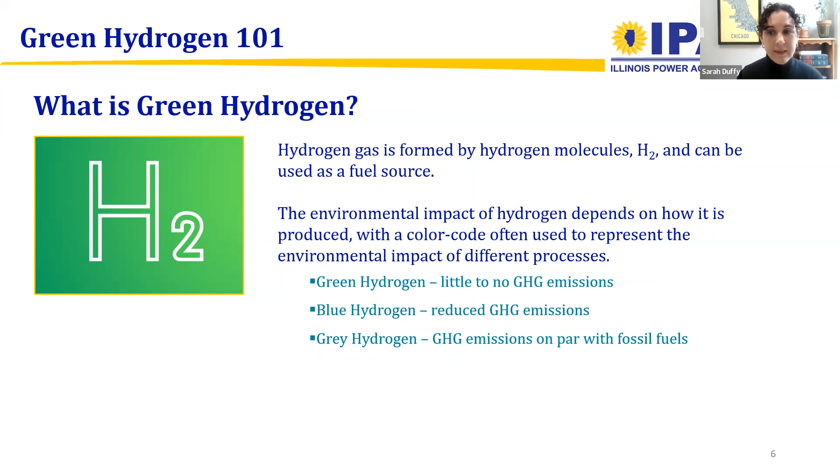So in terms of why this is important and why the Illinois Power Agency is even talking about green hydrogen, mitigating climate change for the most part is about energy sources. And in Illinois, we've done a lot on tackling the greenhouse gas emissions of our electricity sector, mainly through the programs administered by the Illinois Power Agency. But in order to really fulfill the decarbonization that we've set out as a policy of the state, we need to think about the energy that's used outside of our electricity system.

And we also need to think about how to balance our electricity system when we're using more and more sources like wind and solar that are only online in certain times of the year and certain times of the day. So to fill that gap that we right now use fossil fuels for, hydrogen could be a zero carbon solution. When it's burned, its only byproduct is water. And so if we use emissions-free methods of production, it's a completely zero carbon process.

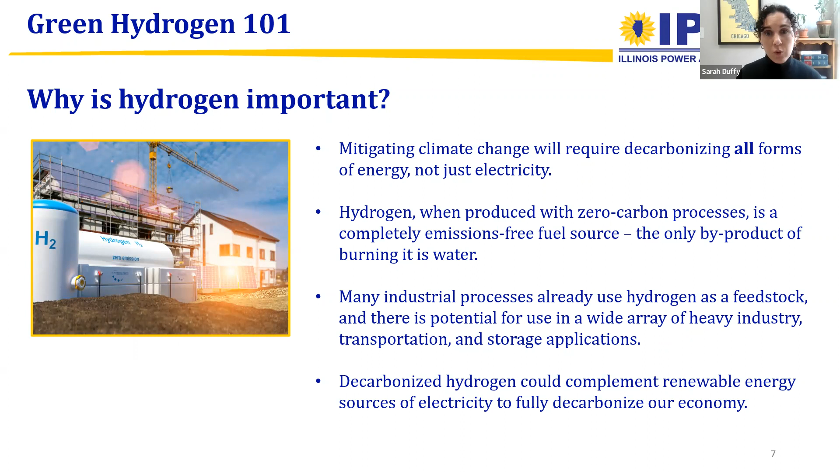It's already being used in a lot of industrial processes as a feedstock. So it's already been proven as an industrial fuel source, and also in processes in chemicals and fertilizer production. Additionally, it could, as I said, complement the renewable energy sources we use on our electricity grid as a potential to balance out those intermittent sources. So it basically adds flexibility as a decarbonized fuel source, and a little bit more predictability to complement the current economically and commercially available renewable energy sources. Next slide.

So as I mentioned, there are a number of ways we can produce hydrogen, and by we, I mean the industry and climate advocates and researchers have informally dubbed these by color as a shorthand for the fuel source and the environmental impact. So currently, the most common way to produce hydrogen is using fossil fuels, mostly through natural gas in a process called steam methane reform, commonly referred to as gray hydrogen. This is currently commercially viable. It's used in a lot of heavy industry, basically combining high temperature steam with natural gas to produce hydrogen, and also has some process and combustion emissions as well. So a couple of sources of greenhouse gas emissions from the gray hydrogen.

One way to abate that would be to marry that with carbon capture and sequestration. This is referred to as blue hydrogen, essentially the same process, but with an added carbon capture system at the end, and depending on the extent of the capture of those emissions, that can reduce the emissions from production of hydrogen by 50 to 90%.

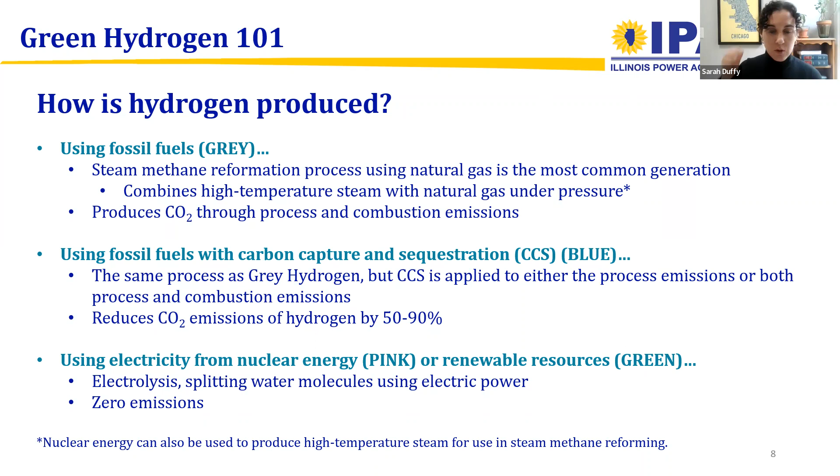In terms of zero emissions production methods, basically this would be through electrolysis, using electricity to split water molecules to produce pure hydrogen. And in that situation, you have to use zero carbon sources of electricity in order to have zero emissions. So this would either be through nuclear energy or renewable resources like wind, solar, hydroelectric, or other zero carbon electricity sources. So when using those, the entire production chain and its end use turn it into a zero carbon fuel source. Next slide.

So this is a quick overview of the main differences between these various production methods. Looking at the fuel type that they're using, the cost of these production methods per kilogram of hydrogen gas, and then the carbon emissions per kilogram of hydrogen. As you can see, there's a range for the cost per kilogram, and those ranges get bigger as we go to the right of the table.

So the cost per kilogram of gray hydrogen is pretty well known because that's already in use widely in the industry. For blue and green hydrogen, the range gets larger because there aren't a lot of commercial applications of these methods. And so it really depends on the capital costs and the cost of electricity in the area and other variables. For nuclear, it's a bit harder. I wasn't able to find reliable estimates of the cost, but I think it would probably be similar to green, maybe a little bit higher, because nuclear electricity is usually the most expensive type of electricity available to the grid.

In terms of CO2 emissions, you can see that blue hydrogen will reduce the per kilogram carbon emissions significantly, but it really depends on how much of those emissions get captured by the CCS system.

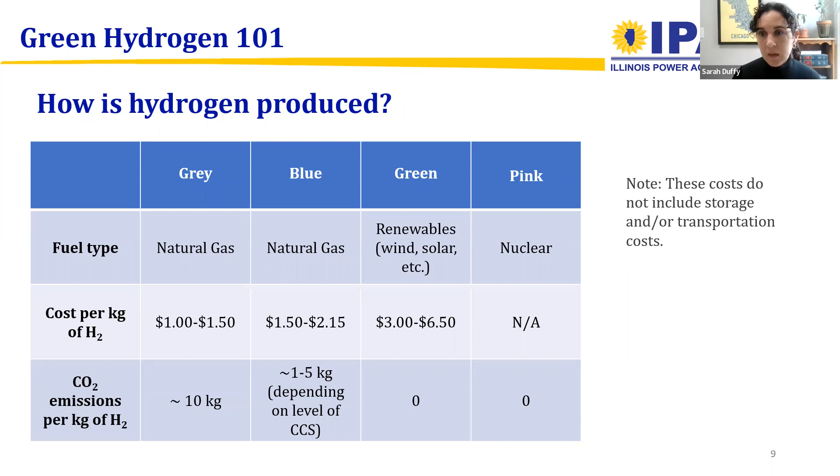Next slide. So, given all of that, I mentioned earlier that there are a lot of applications where electricity is not the best technical option for powering different activities in the economy. Right now we're using fossil fuels for those, but this is where hydrogen can really be a nice solution to those gaps in our decarbonization plan. So the three main applications, and this by no means captures every potential use for green hydrogen, but these are the main buckets.

Transportation is a really important one. I think everyone's heard of the potential for hydrogen fuel cell cars. That has not really been growing to scale in the way that electric vehicles have in passenger vehicles, so vehicles that people buy for personal use. But for things like long haul trucking, rail transport, freight shipping, marine shipping, where electric batteries and having to recharge make it a lot more technically difficult to use electricity as a fuel source, hydrogen fuel could be a really good solution if the cost can come down and some other challenges get addressed.

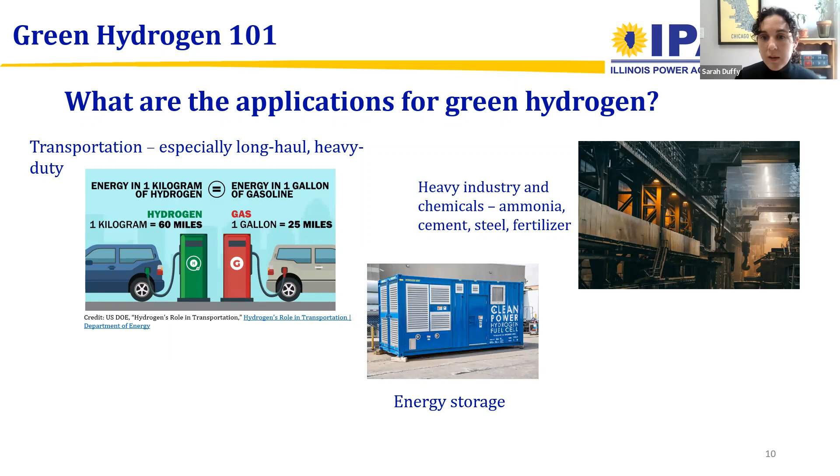Next slide. So as I have laid out, there are a lot of benefits of hydrogen. So why aren't we already using it all over the place? Well, there are a lot of challenges in scaling it up.

Unlike hydrogen, solar and wind as decarbonized energy sources get connected to the grid and the end user has no knowledge that they're using wind electricity versus electricity from coal or gas. The infrastructure is already there and it's easier to integrate those. Not necessarily easy, but easier. From a hydrogen perspective, it's not quite as simple to just switch out natural gas for hydrogen gas, and also the production is different.

So there are three major challenges to large-scale use of hydrogen. I mentioned storage. Storage is a challenge because hydrogen is a very low density gas.

And so in order to store enough of it to get the energy that we need out of it, you either need to have a huge amount of storage space or you need to condense it somehow, which requires high pressure or very low temperatures. And so there's a lot of work going on developing storage techniques that are efficient, that are safe. Having such high pressure tanks and storage facilities could pose safety risks. And so developing those technologies is something that still needs to be sorted out.

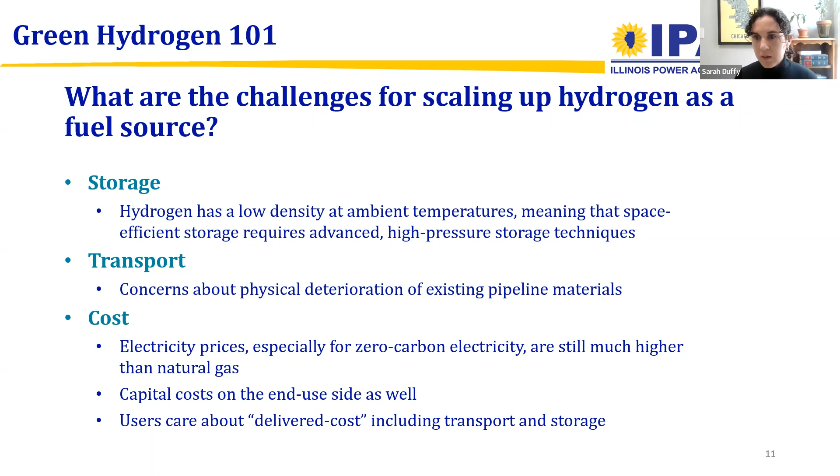Next slide, I think that might be it for me for now. Yep. So I'm going to pass it to Patrick and he can give even more detail now that you have the baseline, most basic elementary things from me. Patrick, who is an actual expert in this, can discuss more about what's going on in research and policy.

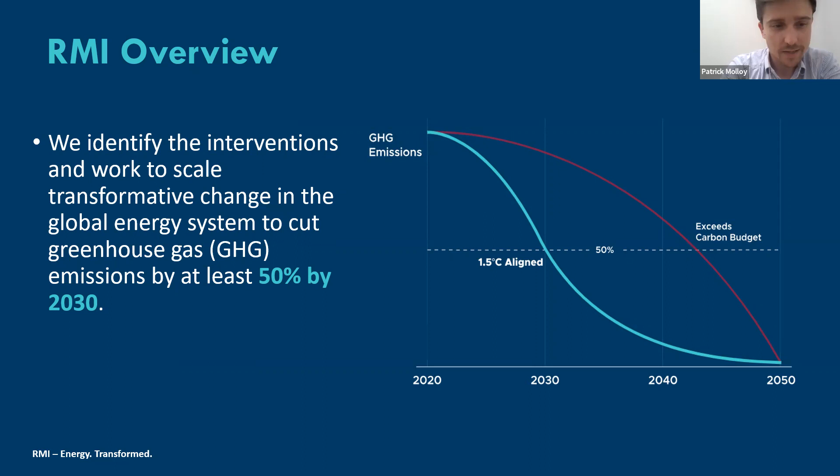So I suppose as a first question, if we can click to the next slide, one of the things to note about hydrogen, and we all hear an awful lot about it, is that no matter what global energy scenario we look at across every kind of major producer of scenarios, we're looking at a many multiple scale increase in the volume of hydrogen consumed every year. So right now, globally, we're directionally probably 120 million metric tons, heavily consumed within the petrochemicals and the fertilizer sectors.

And I think fundamentally the point in all of this is that hydrogen will play a key role in decarbonizing certainly a lot of the hard to abate sectors, but because of its flexibility, it has application in a lot of other areas where we have existing challenges within specific systems. So if we could click to the next slide.

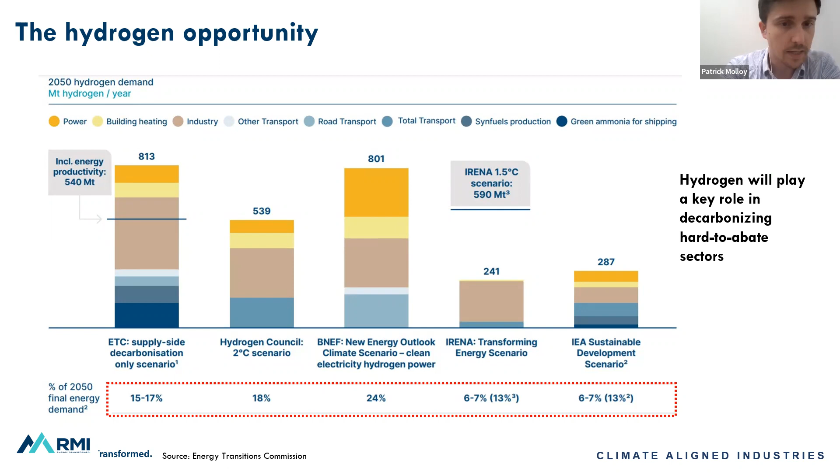So one of the foundational points that's worth bearing in mind here is, why do we need hydrogen? Why now? Well, that 120 million metric tons that I mentioned is about 2% of global emissions today. That gray hydrogen that Sarah mentioned earlier, it goes up and down a little bit depending on how well the system's designed and run, but it's about 12 kilograms of CO2 per kilogram of hydrogen produced through that SMR process.

And as mentioned above, all the major studies that you see kind of promote hydrogen as a molecular pathway for certainly industrial decarbonization, as well as a lot of other use cases. We've talked about shipping and trucking there as well. Obviously, conversations around long duration storage as well. So the flexibility starts to be valuable in this decarbonized pathway.

But where this is truly interesting is when we start to look at the actual downstream use cases and what role it can play in decarbonization. So steel emissions, approximately 8.5% of global CO2 footprint. We can move to a scenario where that is essentially removed, and that's by changing our process from blast furnace, basic oxygen furnace style systems to direct reduction of iron using hydrogen as the feedstock there. Ammonia, basically swapping out those SMR units and producing hydrogen through electrolysis with renewable energy and water.

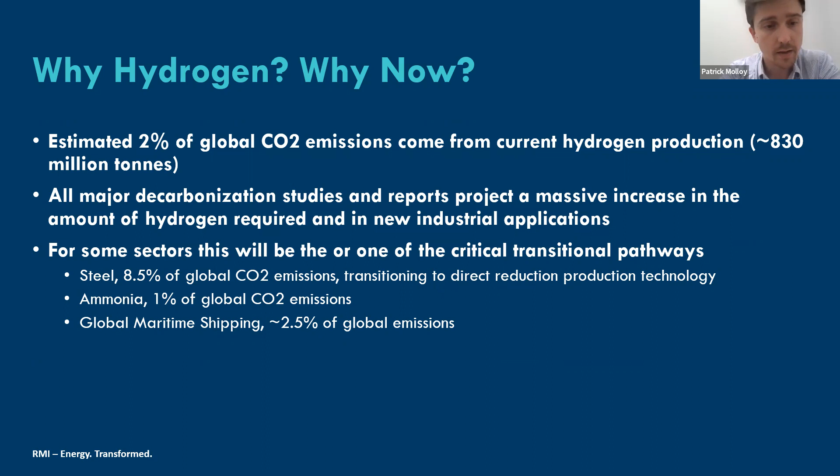So Kevin, your question, PEM is a proton exchange membrane, or it's interchangeable with polymer electrolyte membrane systems. So PEM is a smaller modular system, typically in 1 to probably 4 megawatt stacks. The other dominant technology you'll hear about is an alkaline electrolyzer system, and they tend to be much larger in physical size, and they're also a lot older technology as well.

All of this is to say that as we stand here today, directionally maybe about $700 a kilowatt for a PEM electrolyzer kilowatt deployed. A couple of years ago, that's probably pushing towards $1,500, $2,000 a kilowatt. And there are very clear pathways and mechanisms and levers to push us quite rapidly towards a $200 a kilowatt system. And there's an awful lot of debate about this, and I'm certain that folks on the call here have heard quite a bit about whether these are realizable.

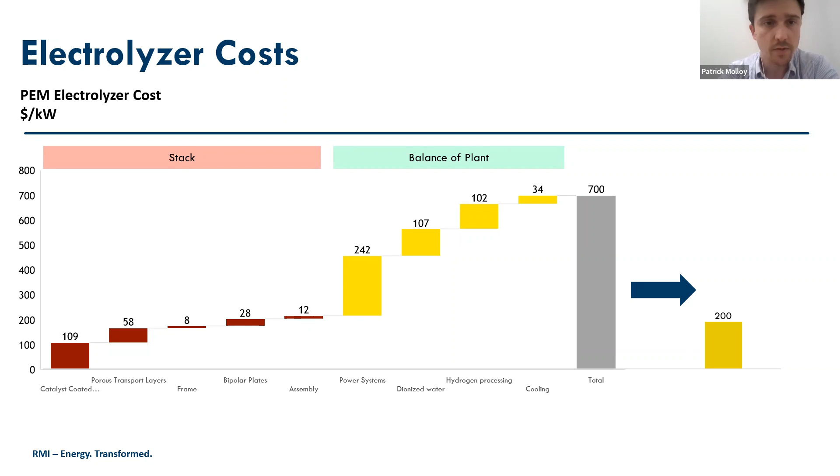Some of this is around manufacturing. It's a maturity of the production of components that go into these things. Some of it is about system design and improving it, and some of it's just down to deployment and building facilities that can produce these things with low error rates at large volumes, and things that aren't strange relative to every other sector. And if we can click onto just the next slide.

But the DOE also has its Earthshot target of $1 a kilogram by 2030, and there's reasonable reason for optimism around that potential, and we'll speak to that a little bit more in a second. So maybe the next slide, please.

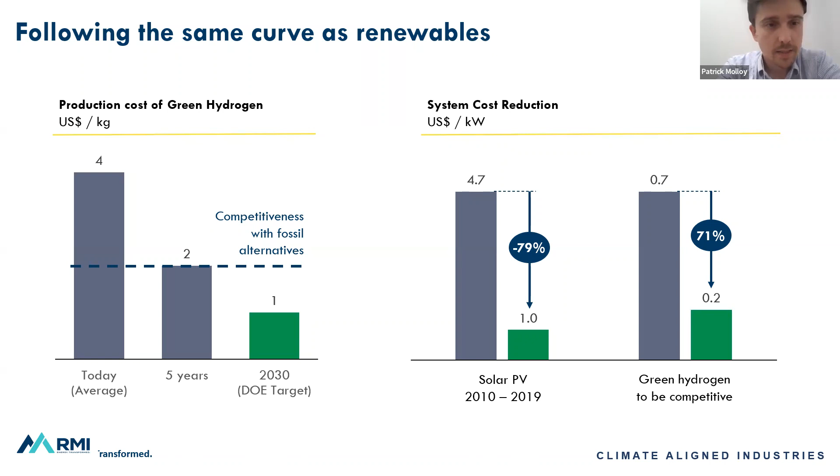So I'm going to use a non-Illinois example, but one that should be indicative of what the opportunities and the potential here is. So looking at a Texas example here, we have developed an optimization model that looks at how we would design green hydrogen systems in various locations, given various cost expectations, both in terms of the energy, but also in terms of the capital stack.

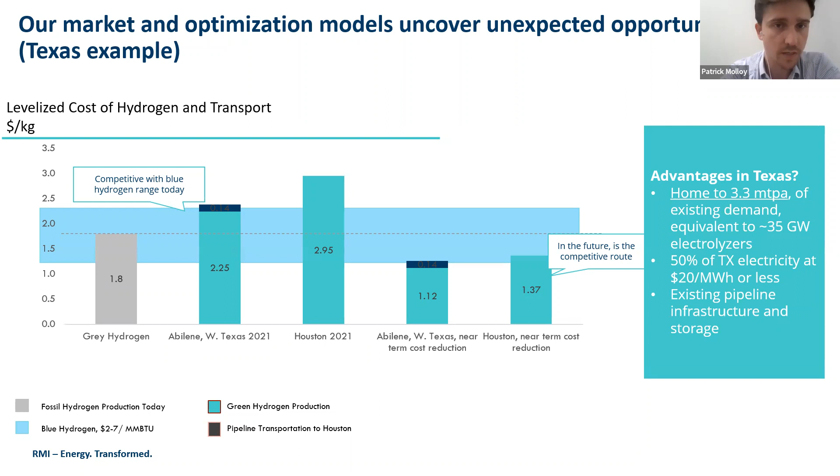All of these factors you have to take account of when thinking about and deploying these systems. And that's where the use case aspect comes in quite critically, because if you're trying to convert a steel facility or a fertilizer facility, availability of supply is critical. With fueling stations for vehicles, it's more intermittent, so you can have more of a stock and flow style scenario. But you are really designing to what your use cases are today, because we do not have that fully scaled market with abundant supply and multiple offtakes. So that system design dynamic is certainly important, and just as important for the power sector if there's a long duration storage aspect to be considered. So maybe into the next slide.

So obviously the Earthshot, which I mentioned, which is that $1 a kilogram target by 2030. There's an awful lot of work around standards and harmonization around those. And then obviously the bipartisan infrastructure law, which allocated around $8 billion to hydrogen hub development.

It's also worth noting that I think it's through Build Back Better, but there's still a conversation about if that passes, a hydrogen production tax credit of up to around $3. Certainly, green hydrogen would likely be the eligible producer for that $3 PTC. I can't speak to the nuclear option, but I certainly know that the carbon footprint aspect would drop that PTC. So the blue hydrogen routes would likely be impacted by that if it were to pass.

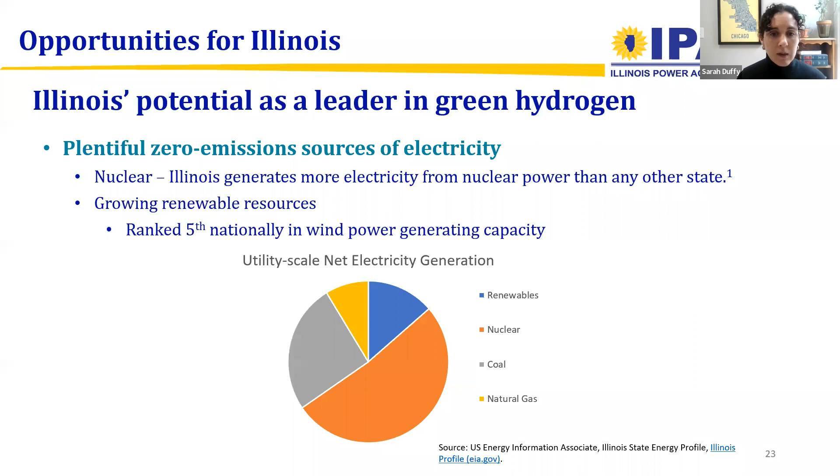We're also the largest producer of nuclear power in the US. So if we want to look at whether nuclear could be a good source or an economic source for producing hydrogen, we're really well placed to be the site of that innovation. Next slide.

In addition to that, we already have a lot of potential for application, so creating a market and demand for the product. We have a high concentration of facilities that already use hydrogen, such as ammonia production and other industrial processes. We already have gray hydrogen production facilities, so hydrogen producing companies are already based in Illinois. So there's already a robust market for the product. We just need to find economic ways of switching that production from gray to green. Next slide.

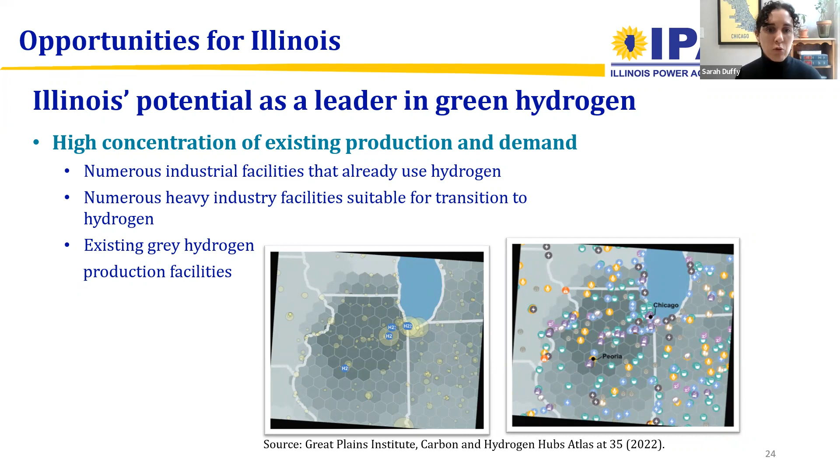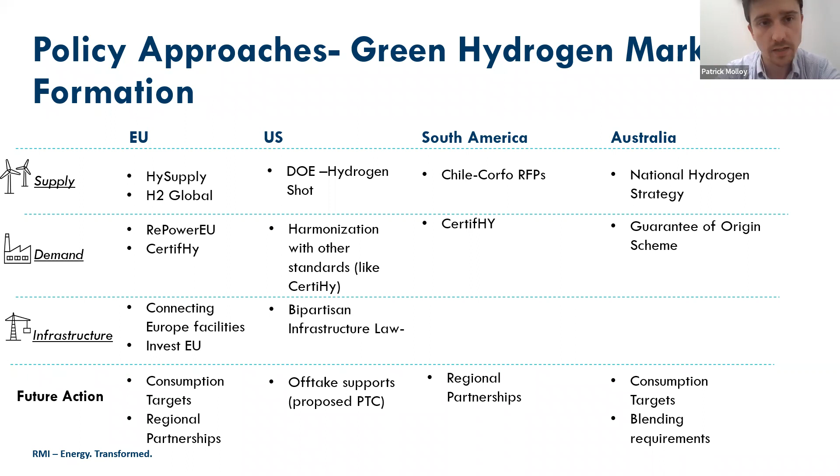It is approximately 10 kilograms of water, directionally 10 liters of water, depending on the efficiencies. It's probably slightly more than that with losses, but it's not insubstantial, and it has to be managed. But also, if you are thinking about hydrogen use, if you put it through a fuel cell, you get water vapor back out the other side. We're not necessarily talking about destruction or combustion in many of these use cases. But yes, there is a water use here that you have to be cognizant of, certainly.